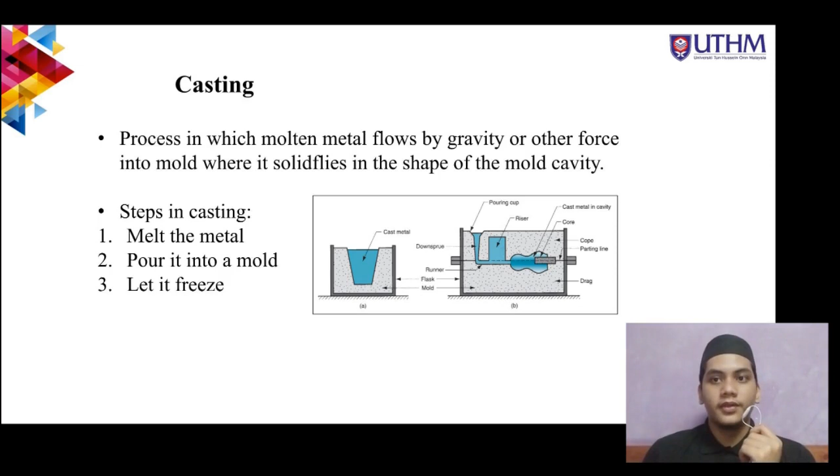There are three simple steps in casting. The first one is melt the metal. Pour it into a mold and let it freeze. As shown in the figure, figure A is the open mold, meanwhile figure B is the closed mold.

Heating means we put the metal into the heating furnace until the temperature reaches above its melting temperature, so the metal will melt and can be poured into a mold.

Pouring is the process where we let the metal flow into a mold so it can spread to all regions of the mold before it solidifies, especially to reach the main cavity.

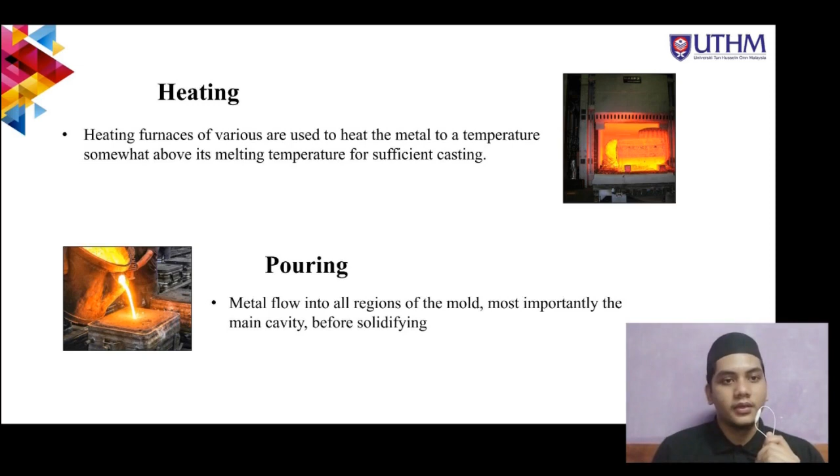Solidification process. Solidification can be simple, meaning the metal liquid turns into solid. The liquid changes into solid during cooling. The energy of liquid is less than that of the solid above the melting point. Hence, the liquid is stable above the melting point.

Below the melting point, the energy of liquid becomes more than that of the solid. Hence, below the melting point, the solid becomes more stable than the liquid. Therefore, at the melting point, liquid gets converted into solid during cooling. This transformation of liquid into solid below the melting point is known as solidification. The solidification process can be classified into metal, ceramics, polymer, and polymer matrix composites.

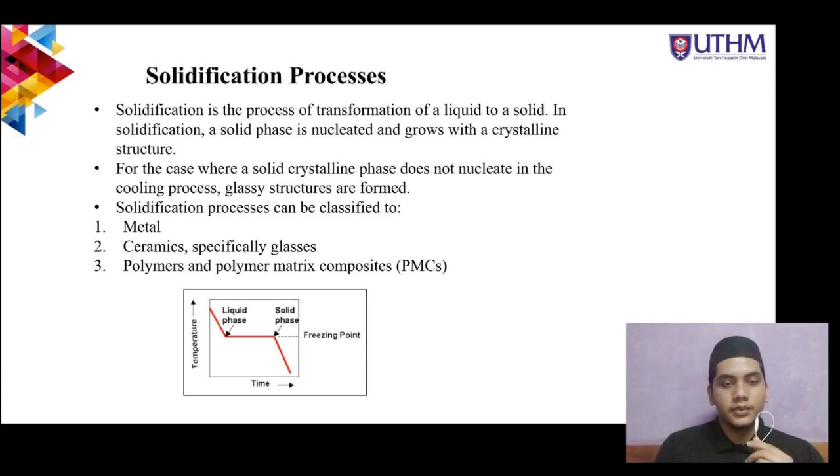For the next subtopic, metal casting process. Sand casting is widely used for casting process because it can almost be used for all alloys. Sand casting can be used for metals with high melting points.

However, for the sand casting method process, a new sand mold must be made for each part produced, since the mold is sacrificed to remove the casting.

As shown in the figure, there are types of patterns for sand casting: A. Solid pattern. B. Split pattern. C. Match plate pattern. And D. Cope and drag pattern.

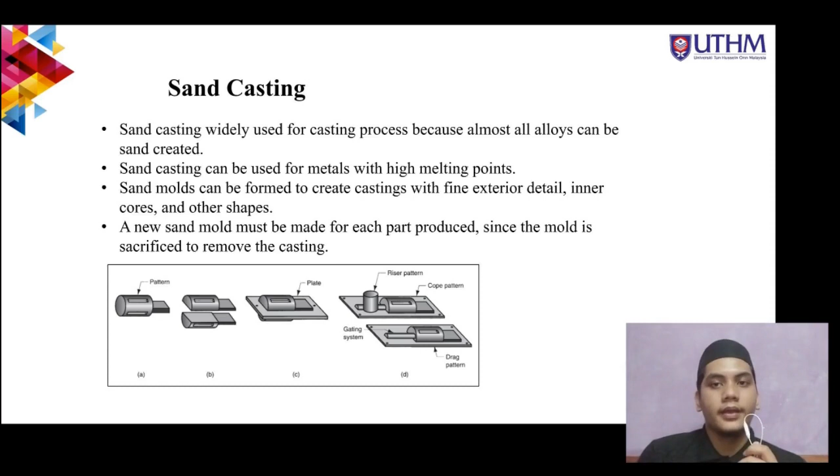Besides the sand casting process, there are other expandable mold casting processes. First, shell molding - a casting process in which the mold is a thin shell made of sand held together by thermosetting resin binder. The second one is vacuum molding, which uses a sand mold held together by vacuum pressure rather than a chemical binder.

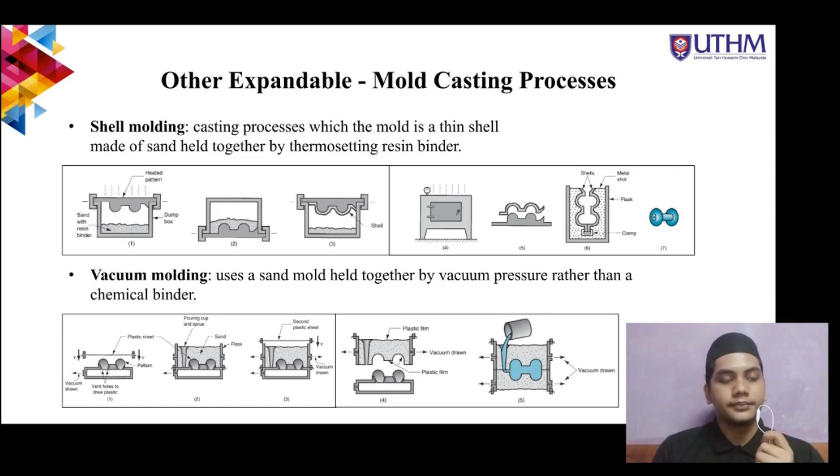The third one is the expanded polystyrene process. It uses a mold of sand packed around a polystyrene foam pattern, which vaporizes when the molten metal is poured into the mold. The fourth is investment casting.

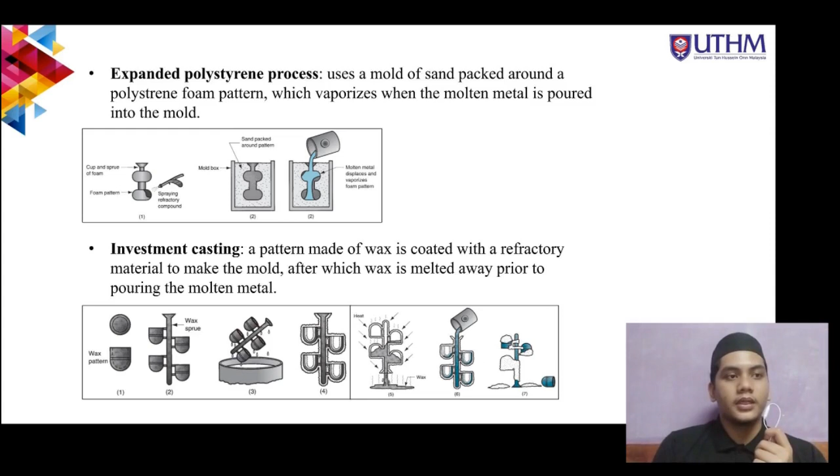A pattern made of wax is coated with a refractory material to make the mold, after which the wax is melted prior to pouring the molten metal. Next, plaster mold casting is similar to sand casting, except that the mold is made of plaster of Paris, or gypsum. And the last casting is ceramic mold, similar to a plaster mold, except that the mold is made of a refractory ceramic material that can withstand higher temperature than plaster. That's all from me.